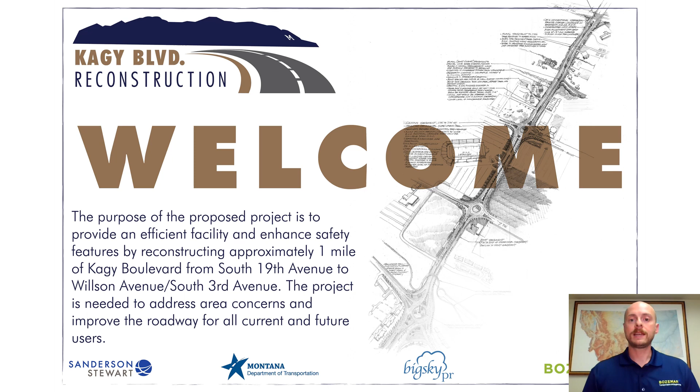The limits of our Kagy Boulevard reconstruction project extend from South 19th Avenue to the west, all the way to Willson Avenue to the east, along a length of about 1.1 miles. The project includes traffic signal modifications at the existing intersection with 19th, roadway reconstruction to address deficiencies between 19th and 11th, a proposed roundabout at South 11th and South 7th, and then roadway reconstruction from those intersections all the way to Willson. We also anticipate traffic signal revisions and improvements at Willson as well.

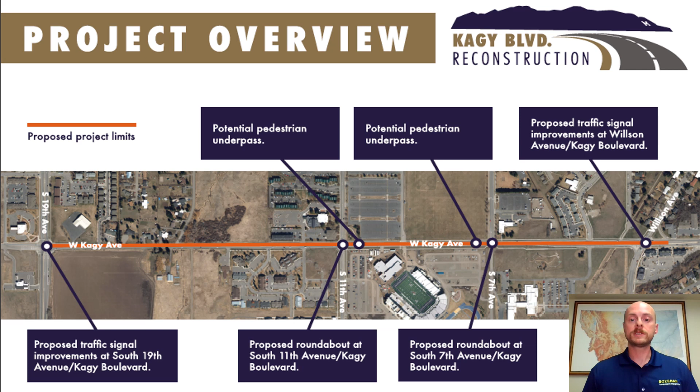The Kagy reconstruction project began in 2015 to address the project that had been identified in the City of Bozeman's Transportation Master Plan, and in response to concerns we heard from the community about growth pressures that people were experiencing along the corridor. The project went through significant public involvement in spring of 2016, but was unfortunately eventually tabled due to lack of funding. The project was then revived again in 2022 through our effort to reevaluate traffic projections and make sure we were recommending the most appropriate solutions for the corridor.

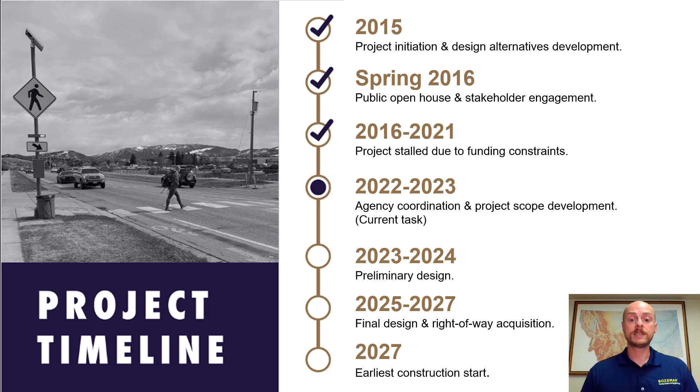We're here now to set final design of the scope of work that will then pass off to our design consultant, the Sanderson Stewart team, for preliminary design in 2023 and 2024, final design in 2025 through 2027, and construction beginning in 2027.

Funding for our Kagy Boulevard reconstruction currently exists from two primary sources. The Surface Transportation Program is contributing roughly $18 million to the project. This funding may only be used on urban highway routes throughout the city and cannot be reallocated to other needs. In addition, Bozeman will be contributing street impact fees to the total of $6.5 million. This funding must be used on only capacity expanding projects and also cannot be reallocated across the city.

Current cost estimates do project a significant shortfall in funding. To address that, we are seeking significant discretionary grants through the Federal Infrastructure Investment and Jobs Act, and in addition, may need to reduce the scope of the project in order to make it fiscally constrained.

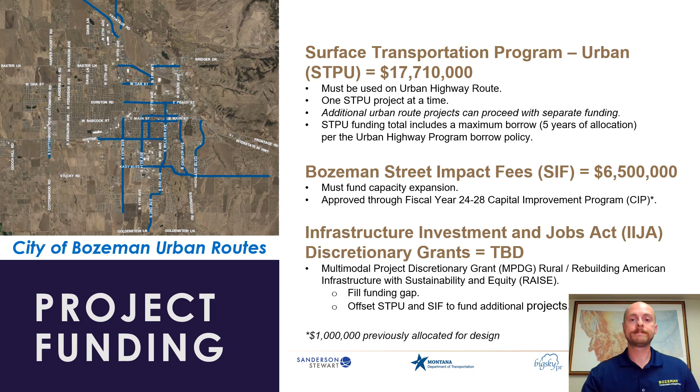We'll now discuss future traffic volumes and projected impacts. I've turned my camera off so you're better able to see the charts on the screen. Our Kagy revisited traffic effort, first and foremost, was intended to ensure that we are not over-projecting future demand on the corridor. We have assumed only the known housing developments within the south part of the city and the trips that they will contribute to the Kagy Boulevard corridor. In addition, we have assumed significant additional bicycle and pedestrian demand will occur along the corridor in order to ensure that multimodal context will address all modes.

Starting at South 19th, we project roughly 22,000 vehicles per day will use the Kagy Boulevard corridor in the future. That escalates up to about 25,000 vehicles between 11th and 7th, and then drops back down to approximately 22,000 vehicles as the corridor approaches South Willson. In addition, we are ensuring that we are projecting traffic as accurately as we can along Stucky, Arnold, and Graf Streets, which are our only parallel routes to Kagy Boulevard in the south part of town.

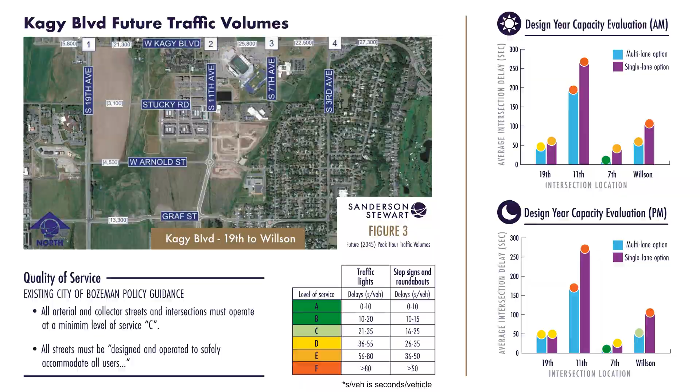We will now seek your input on your preferred congestion mitigation preferences. You can provide your input in our online survey found at mdt.mt.gov. Our question for you is, what is your preferred amount of travel delay in the future Kagy corridor?

If one accepts significant traffic congestion, then a single lane alignment may be most appropriate. If one chooses to accept a reasonable amount of traffic congestion, multi-lane alignment may be most appropriate. And if one wanted to prioritize reducing traffic congestion at all costs, modeling shows that we would be required to build a 6-lane corridor, if not larger.

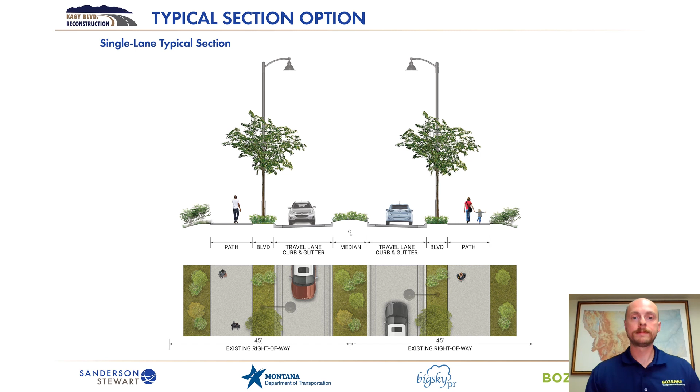The multi-lane typical section for the future Kagy Boulevard consists of the same features as the single lane section, with 1 additional travel lane in each direction. Once again, planted median, along with boulevards, landscaping, street trees, lighting, and shared use paths in each direction would be provided in the multi-lane alignment.

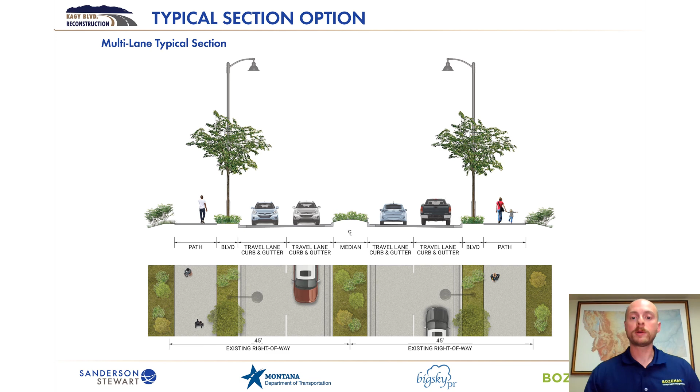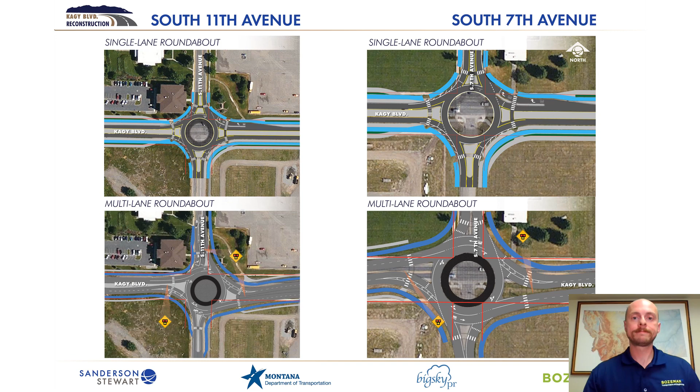Planned pedestrian and bicycle accommodations along the corridor first and foremost include wide shared use paths in each direction. This is the type of facility we hear from our public as the most comfortable and safest for all ages and abilities.

In addition, the project has planned the potential inclusion of 2 grade separated structures. These pedestrian tunnels would occur on the east side of the South 11th intersection and the west side of the South 7th intersection in order to reduce conflicts between traffic, bicycles, and pedestrians traveling north and south along those corridors.

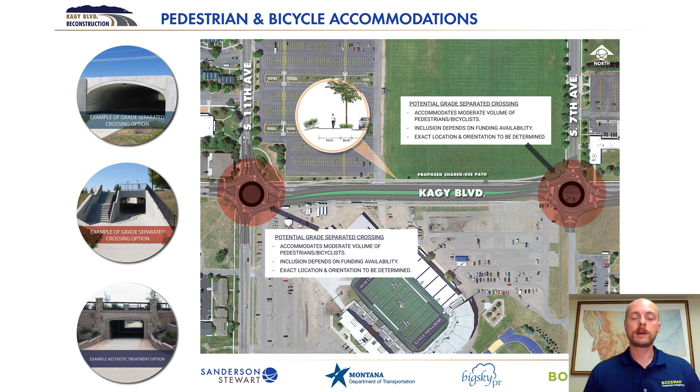That now brings us to our second engagement question. You can once again fill out the survey at mdt.mt.gov. In order to help the project team define the final scope, we're seeking your priority preferences for design. If costs of the project were to exceed available funding, please rank the following items in order of your greatest to least importance.

Those options would be additional capacity along the corridor to increase from a single lane to a multi-lane alignment, the inclusion of pedestrian underpasses to reduce pedestrian and traffic conflicts, project limits from the full length down to something shorter to 7th or 11th, and the inclusion of shared use paths to accommodate bicyclists and pedestrians.